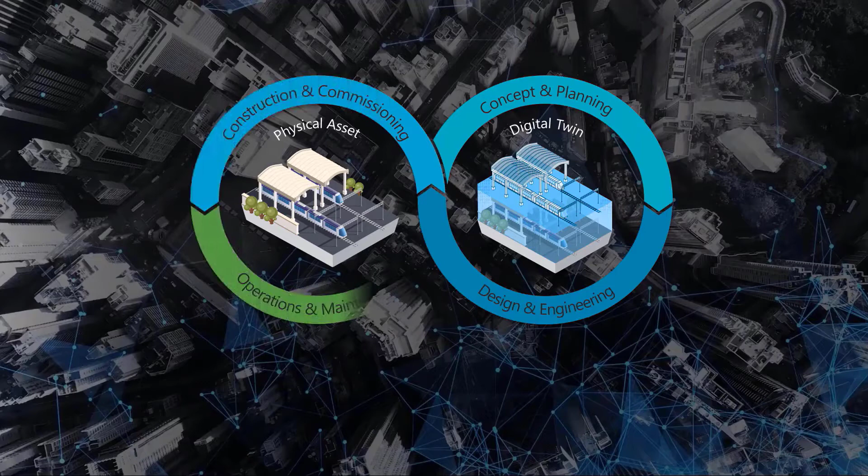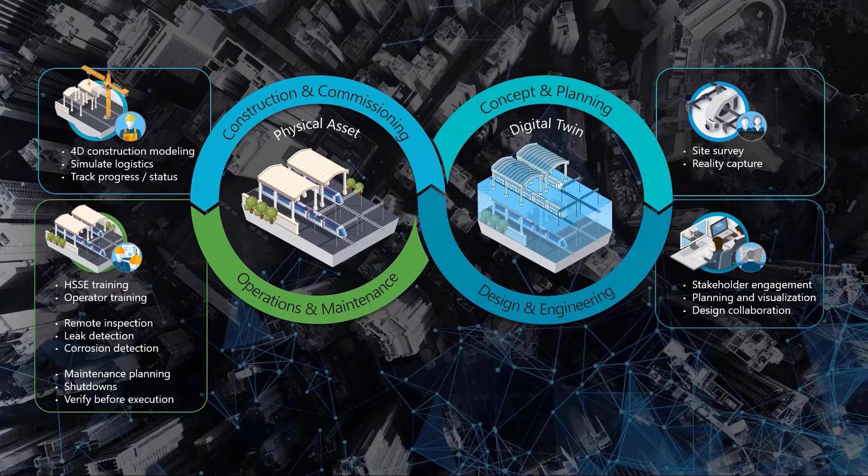We define a digital twin as a synchronized virtual representation of a real-world asset, a digital version of reality that is continuously updated. Now you might be asking yourself, why is this important to me, or what does it really mean? Or maybe, what can I do that I couldn't do before?

For starters, I want you to think about the Uber app on your phone. It's easy to use, provides real-time data, and gets you where you need to go. It's hassle-free and the interface is easy to use. The need to get from A to B never changed. What changed was the entire transactional experience.

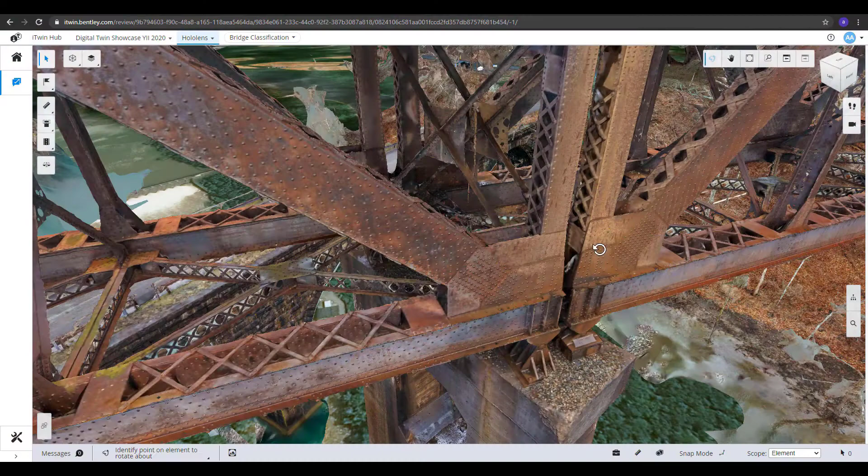When it comes to digital twins, we're taking a similar approach. We believe that interacting with the digital version of real infrastructure should be easy, intuitive, and deliver contextual, relevant information when and where our users need it.

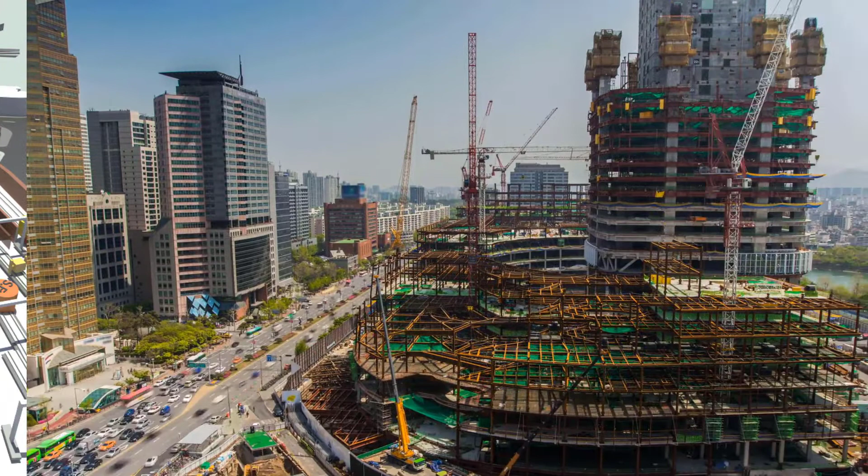How users transact with their information is shifting. We are seeing owners, designers, contractors, and users throughout the supply chain embracing this new way of working. We're talking about true digital evolution and how the physical environment and its real-world infrastructure, including all of the equipment,

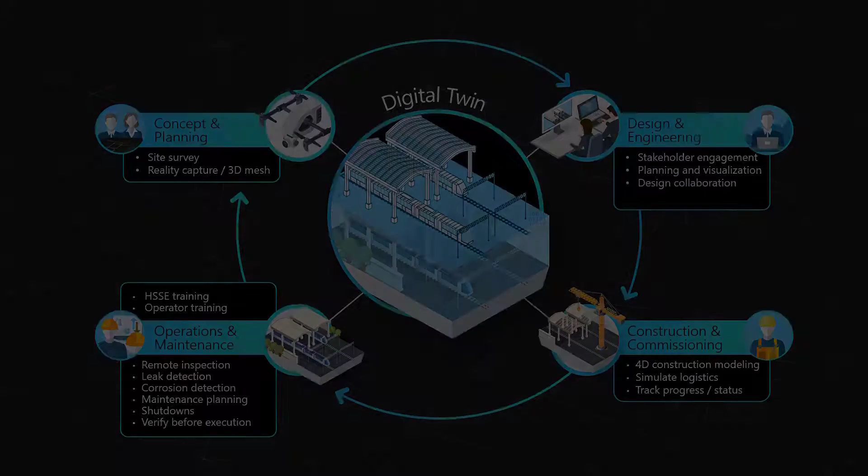materials, labor, sensor data, and related information, is managed throughout the life cycle. A digital twin includes the 3D geometry, design information, documents, issues, photographs, and point clouds, the full history of the asset as it changed over time. This includes the design phase, the construction phase, the operations, the maintenance, and any subsequent redesign.

So what does this mean to you? It means that you can now access, update, and most importantly, respond to information about your asset using an intuitive user interface designed for web, mobile, and mixed reality.

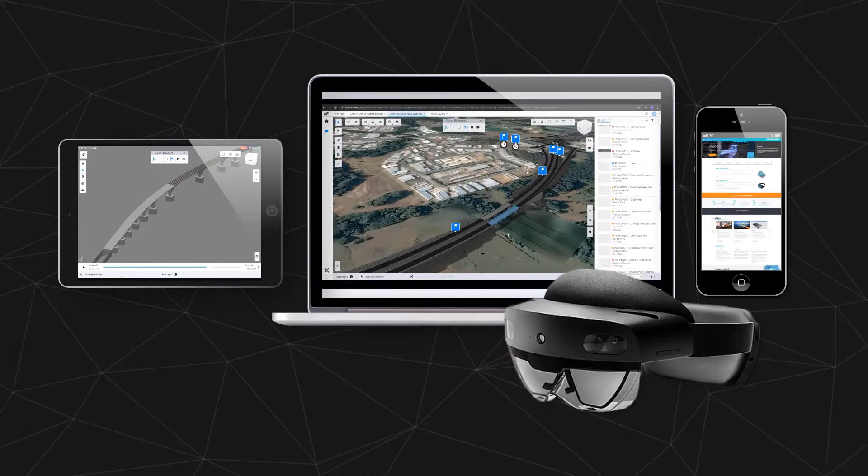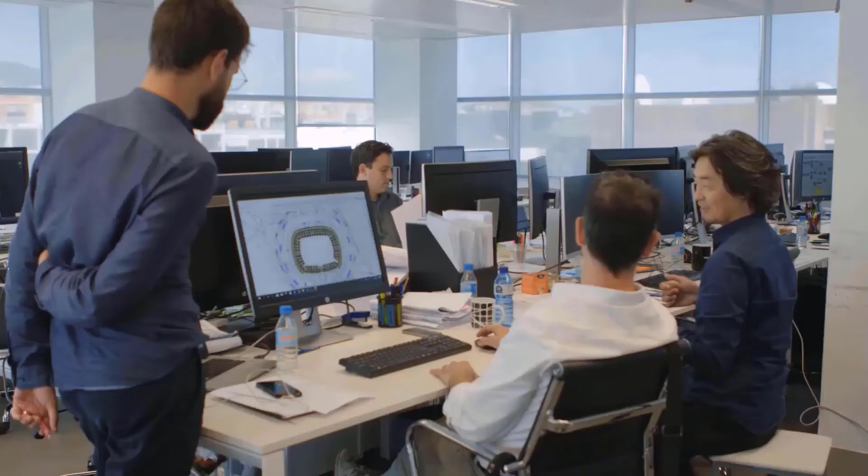So how is a digital twin different from BIM, Building Information Modeling? That's a fair question. The way we see it, digital twin is a non-disruptive evolution of BIM-centered workflows. It's a shift from static models to dynamic models, from files to change ledgers, from desktop applications to web apps, from 2D touch screens to interactive 3D holograms.

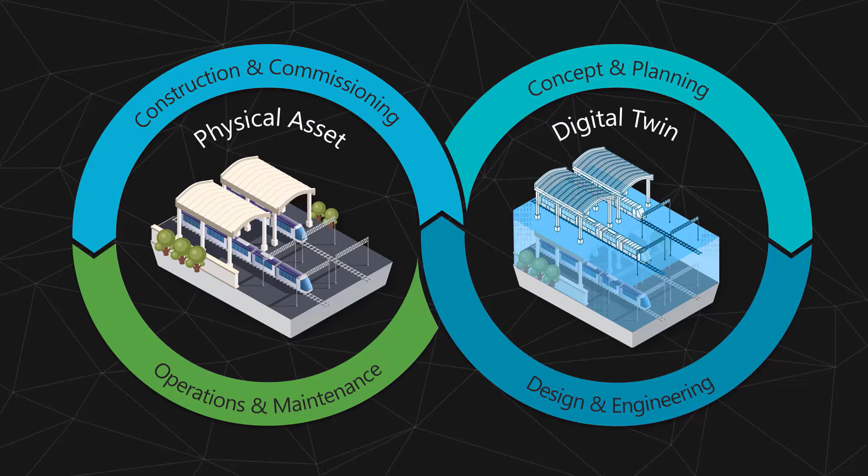Digital twins advance existing model-based processes by optimizing the feedback loop between team members, using modern, accessible user experiences backed by cloud services. The virtual and physical are converging, creating tighter and tighter feedback loops. And that is what leading organizations are getting out of digital twins: tighter feedback loops leading to better decisions, making better improvements in workflow productivity, human safety, and asset reliability.

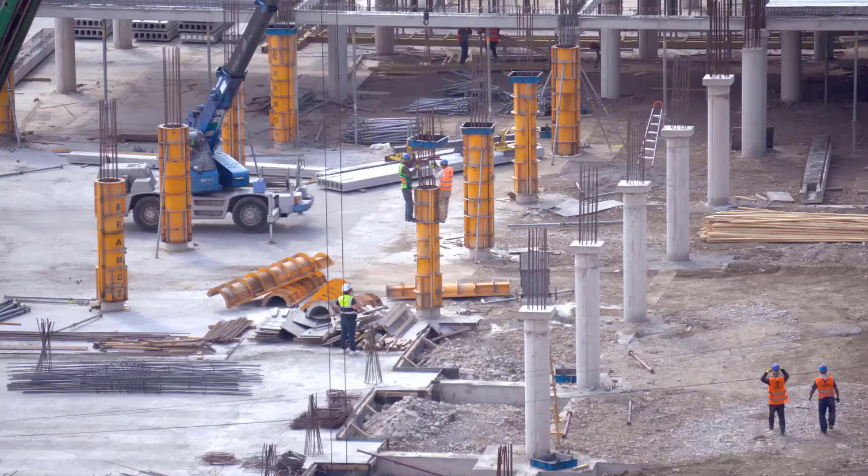For example, when a field engineer updates status on a concrete column being erected in the field, that information is reflected in the construction digital twin, and the project schedule gets updated. Likewise, when a sensor on a pump at a substation detects a problem, that information is conveyed to an engineer wearing a head-mounted holographic display.

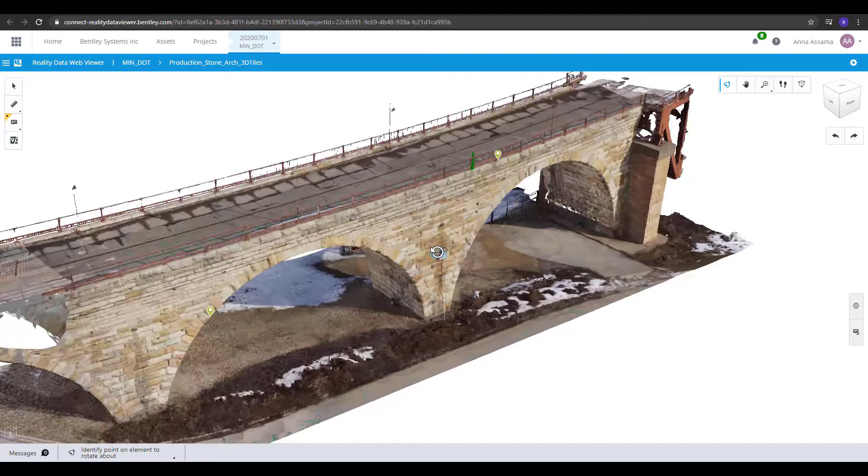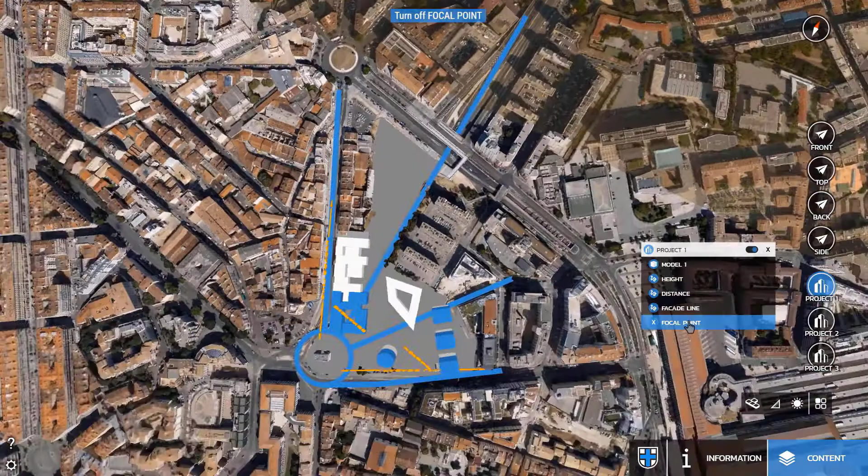And for a bridge inspector, he can now use drone capture with machine learning to automatically visualize defects on the bridge in an immersive 3D experience, allowing the bridge inspection to be done from anywhere. For the general public and citizens and residents in a city, they and the infrastructure that supports the city can be visualized and updated in near real-time interaction.

To talk about the impact of digital twins on city-scale infrastructure, let me introduce Sanjeev Shah to discuss the HS2 project, Europe's largest infrastructure project, and how the city of Helsinki is using digital twins today. So, Sanjeev, please walk us through the ways HS2 and the city of Helsinki are using and managing their digital assets through digital twins. High Speed 2 is Europe's largest infrastructure project.

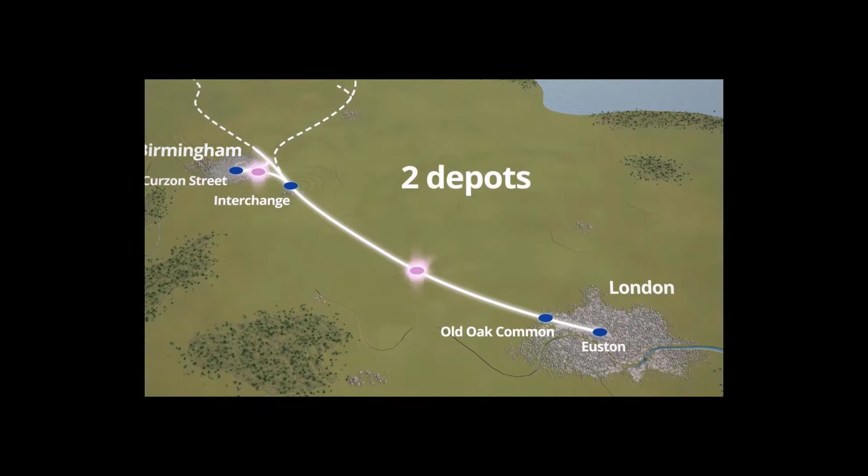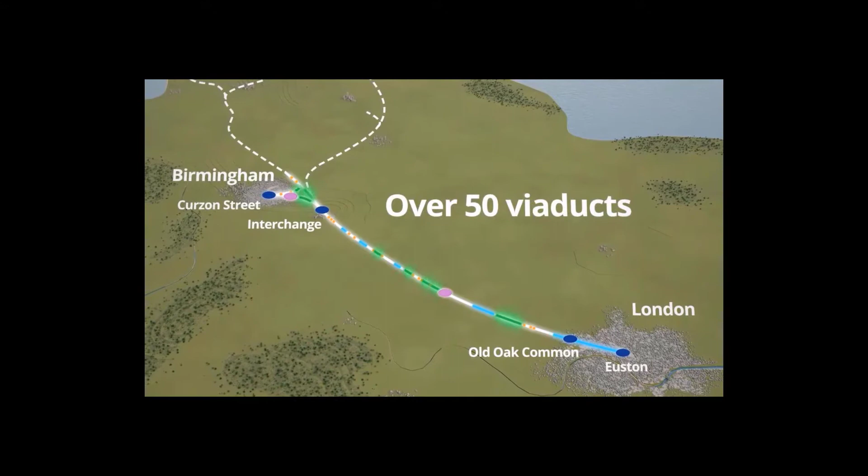But even still, they shared the same problems that many of you will be facing today. They use many specialist systems which create specialist content which is stored in specialist systems. So for a user to get to all of that information, they'd have to be proficient in each of those systems, they'd need licenses for each of those systems, and that can be expensive.

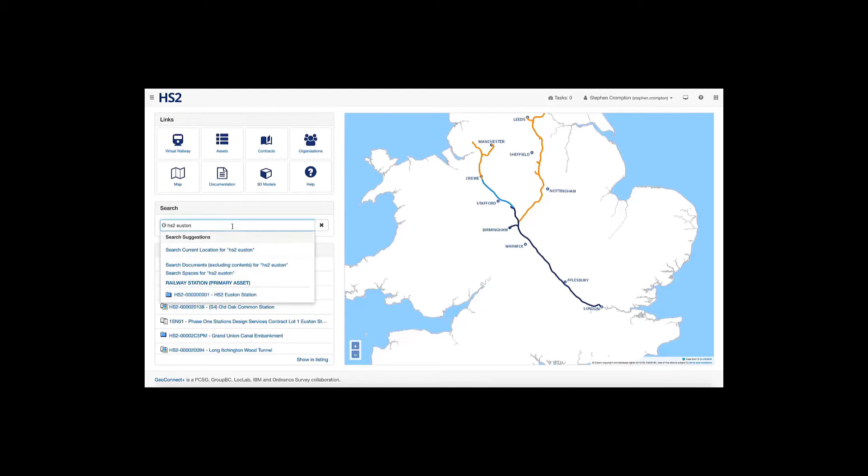It can be prone to duplication errors. It will create waste, it will lead to litigation and issues, and we don't want that to happen to you.

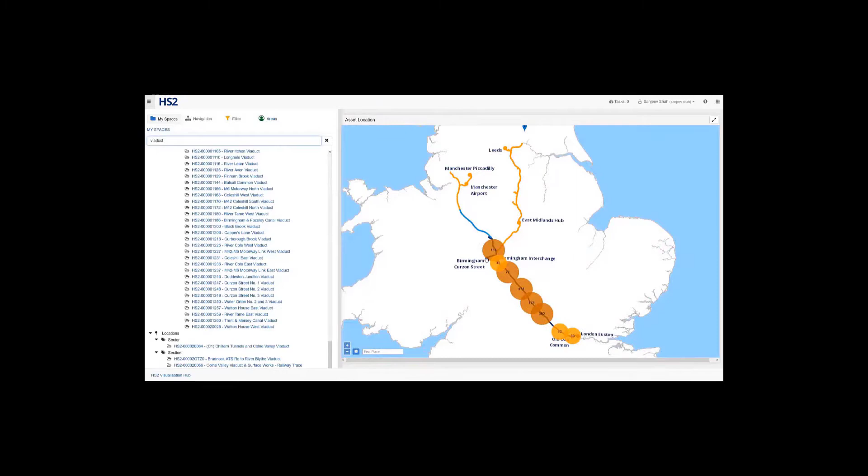What we're seeing, however, and what our users are telling us, is that by far the easiest way to get to content is through a geographical user interface. So here we can see through a quick zoom and a single click, we get instant access to a whole myriad of information.

And it doesn't matter if that information in the top left portlet has come from High Speed 2's asset information database, or whether the information we're seeing from models and from the documents has come from AssetWise and soon to be ProjectWise. The maps we're seeing are a direct federation from Esri ArcGIS.

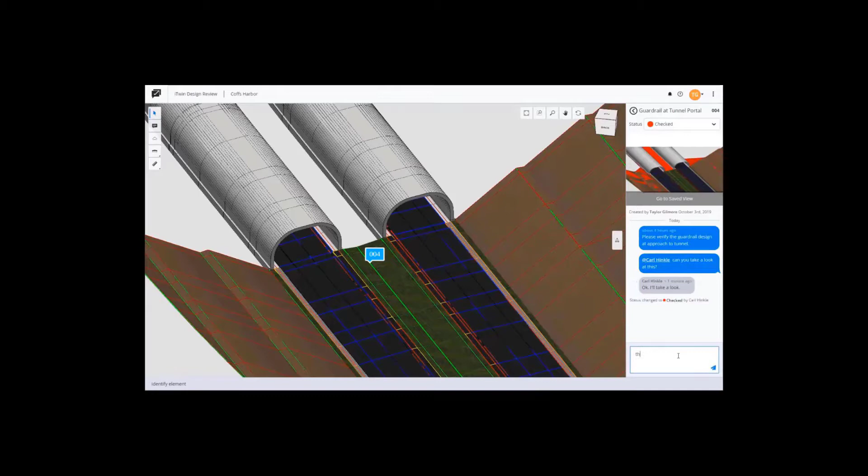But what if you wanted to get into models and see things at detail? Yes, you can just click on the models and they will open up, whether that's in a browser, a mobile phone or a tablet. And it doesn't matter if those models were created in specialist systems such as Revit or MicroStation or Navisworks, you'll still be able to view the whole lot.

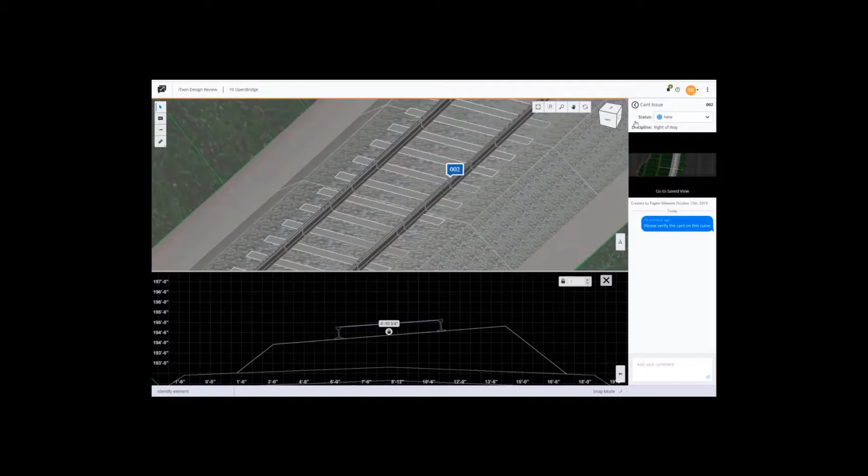It could have been a bridge, and they could have looked at the details of what the construction methodology was. They could have looked at the date that bridge was constructed, and they might have wanted to then zoom out and see all other bridges that were using the same construction methodology, installed at the same date, and that's exactly what we've done here. So on the right hand side, we zoom out, we can see lots of these cameras appear.

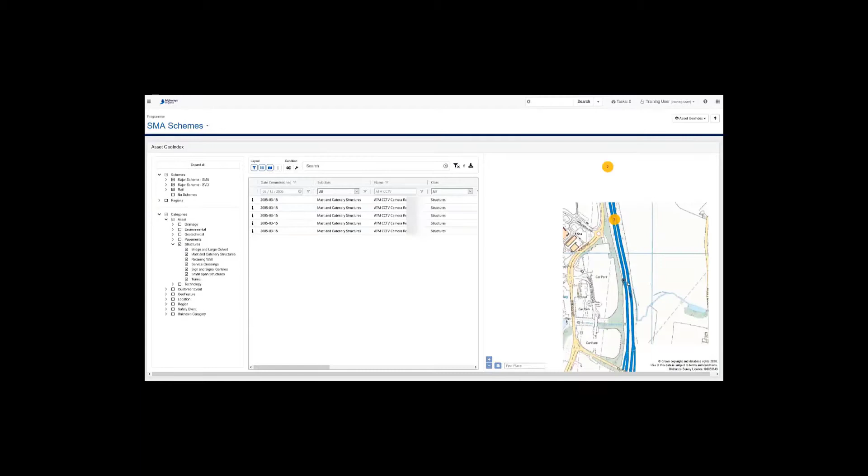A bit like TripAdvisor, what you see in your screen is what it's going to list on the left hand side. So that is now going from micro to macro. So yes, we can do this at scale, as we've just seen.

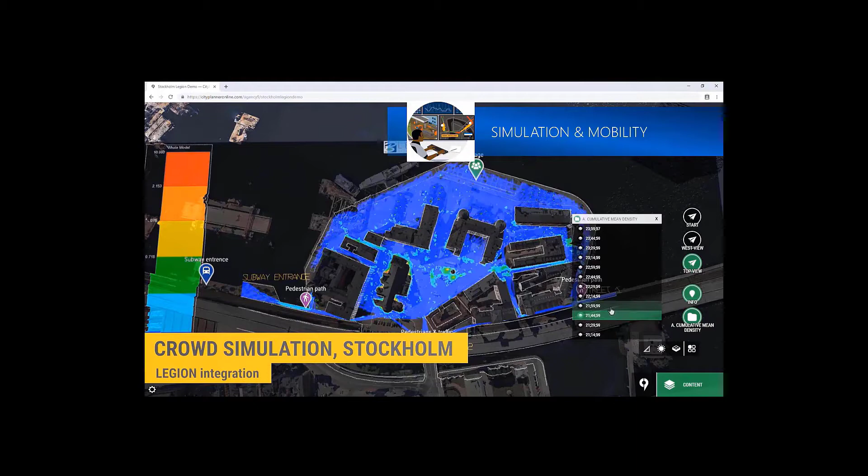City of Stockholm are using digital twins to provide a better experience for their citizens. So by bringing in flood data, information about the population, crime information, all sorts of external information combined to the spatial geometry, the data, the documentation, that is building a full digital twin.

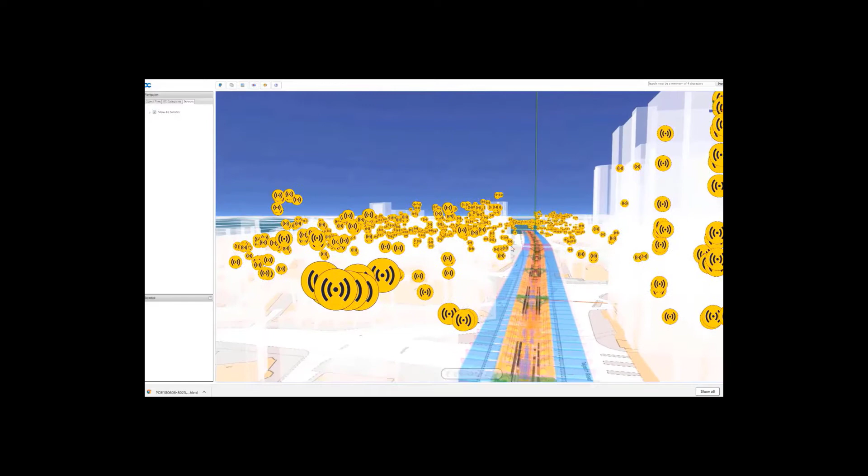But that data need not just be from sensors, for example. If we look at this example here, we can see a project in West London, and would you be amazed if I said these yellow circles are actually representing physical movements in infrastructure up to 1 millimeter? And would you be amazed if I said we've got no sensors installed here?

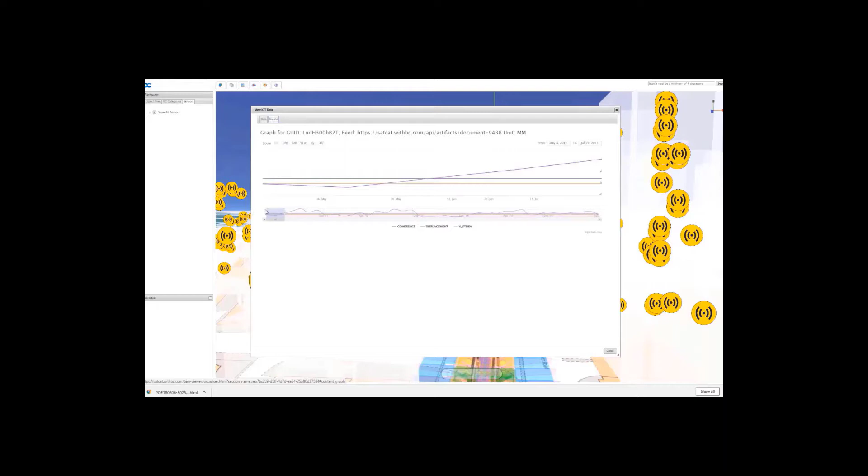All of that data is being captured from space, from satellites. So we can actually see the performance of infrastructure in places where we didn't even know we needed to monitor that. And what's even better is all of this data is being captured continuously.

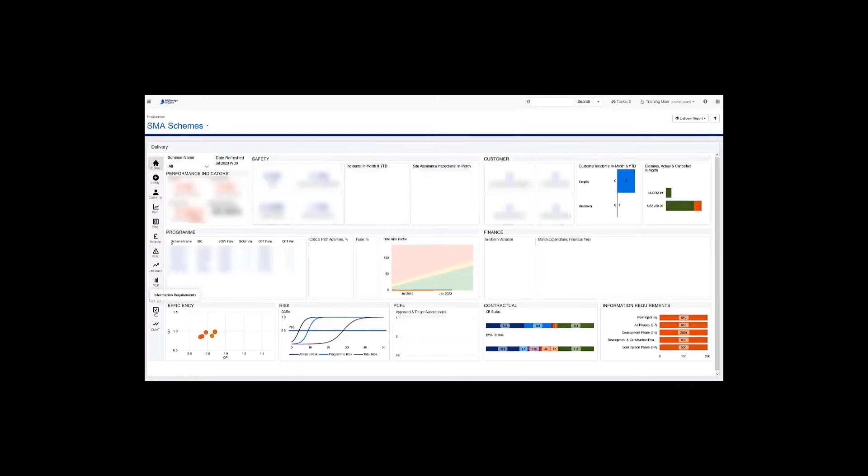So we can now go and tap into that information whenever we want to, which is fantastic. We're now able to run analytics and allow our users to see how they're doing with their KPIs, how they're performing, how their suppliers are performing, what information is missing, and that's the power of a digital twin.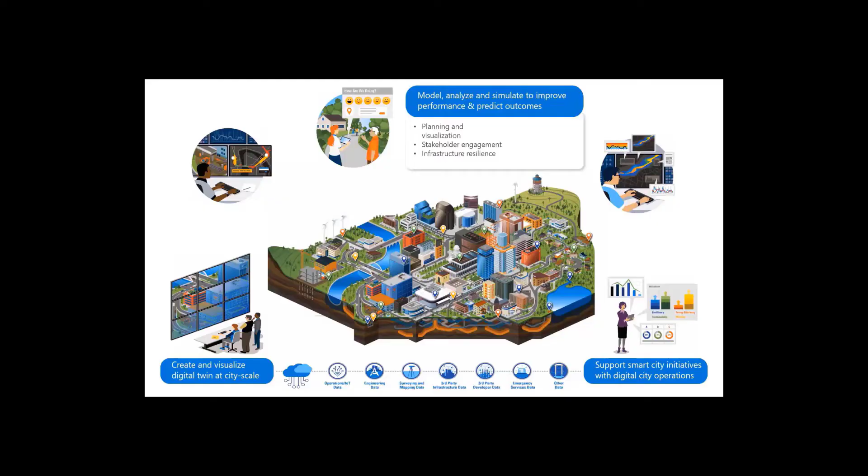Thank you, Sanj. It's great to see the infrastructure digital twin in action. It's been a pivotal year, some would even say a transformational year, when it comes to the collaboration for our entire industry. It gives us a chance to reimagine how we would work together, and more importantly, how our users work together. It allows us to see how our technology is making a positive impact in our users' lives.

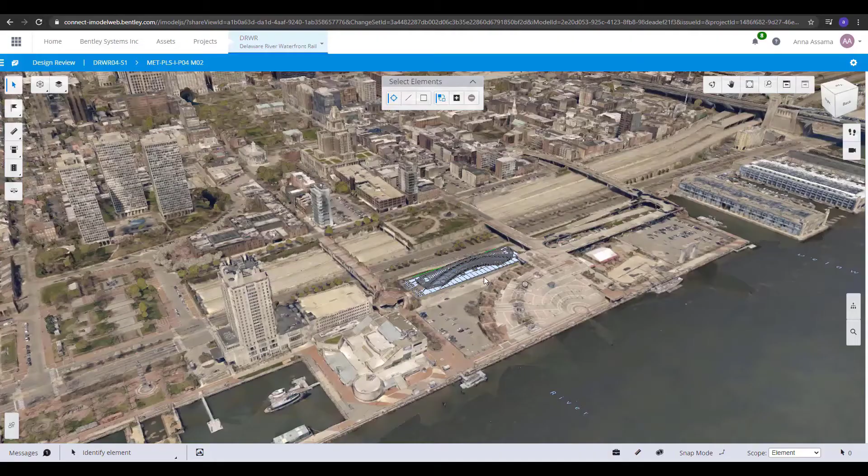Let me introduce you to iTwin Design Review. Design Review is a web-based capability that enables you to review design models with ease. It is open when it comes to source files. You can work with files from Bentley, Revit, Navisworks, AVEVA, SmartPlant, IFCs, or Tekla, any format, you name it.

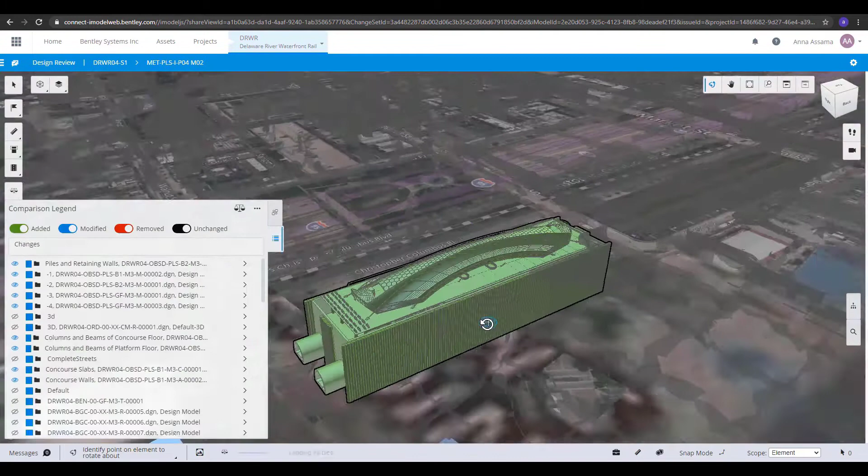Once the models are loaded, you can begin collaborating with all your peers in real time to view project status, identify issues, start solving real-world problems. Everything is web-based.

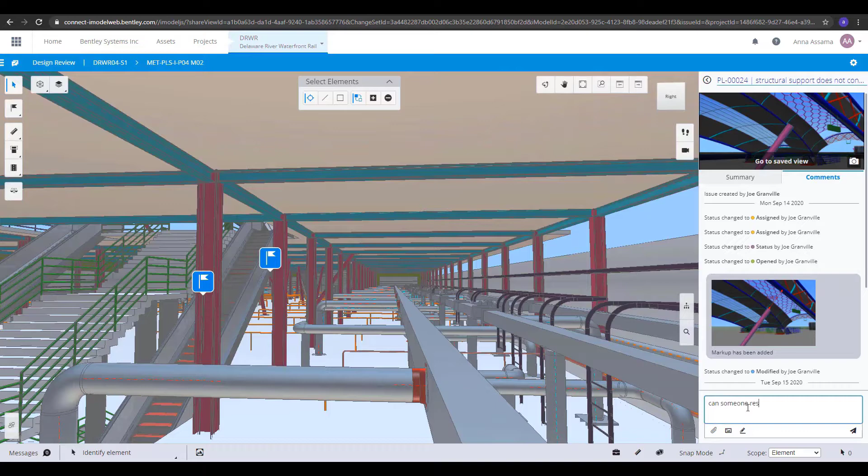As a user, you can log in anywhere using your web browser. Any information that is added from any user, anywhere, persists in the iTwin, making collaboration simple. With real-time chat, issue resolution, model comparison, clash detection, saved views, markup, we've optimized the user experience for communicating about the problems that need to be resolved.

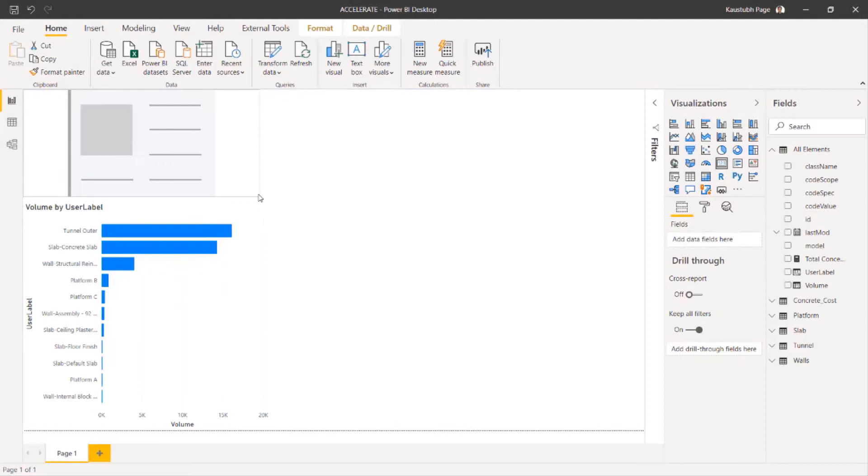In addition to identifying design issues and clashes, you can also perform data quality checks. These automated checks help identify inconsistent data structures and naming conventions, which will help you keep your project well structured and enable data analytics. As Peter Drucker stated, if you can't measure it, you can't improve it.

Having structured data is what feeds the iTwin Design Insights, where you can define key performance indicators such as cost, schedule, risk factors, and carbon footprint.

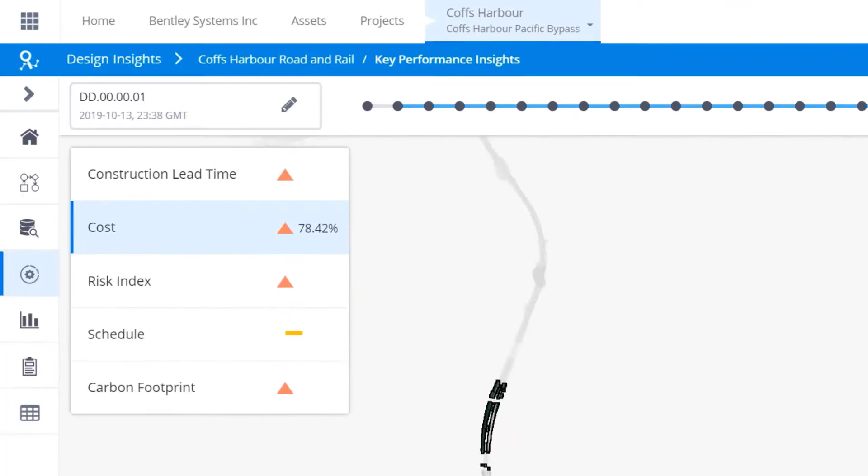When a design is updated, the changes can be visualized from a comparison dashboard. Here you can see trend lines and make informed decisions based on the data.

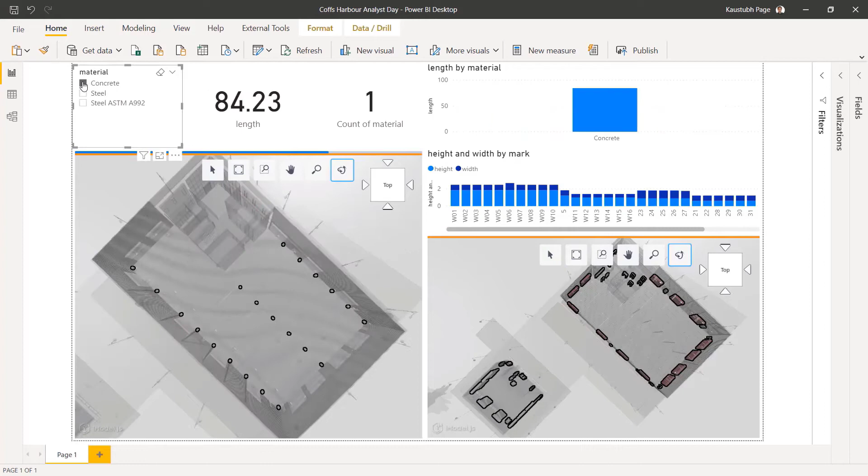In addition to these out-of-the-box reports, we see an increased use of Microsoft Power BI by our users. In response, we've created data connectors so that the digital twin data can flow into Power BI and integrate with enterprise BI reports.

In addition to the Power BI integration, we're also excited to announce that iTwin Design Review is now integrated with Microsoft Teams. The use of Teams is accelerated dramatically, and this integration brings iTwin functionality directly into the team experience.

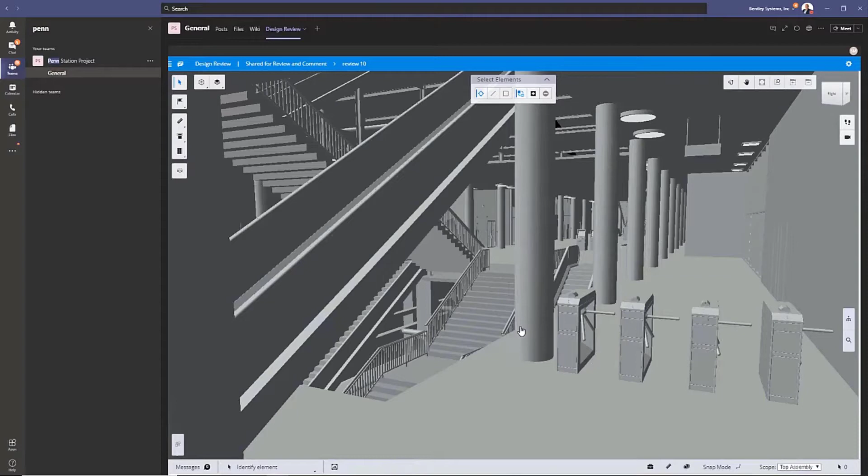Now with a few clicks, you can add an iTwin tab, making it easier than ever to access digital twin models. This opens up digital twins to non-technical users beyond engineering, helping them correlate and make sense of complex data in an interactive visual medium.

We've seen the power of iTwin, a web service that enables teams to optimize collaboration. Now let's look at how our users are using the same technology to bring design to life during the construction phase.

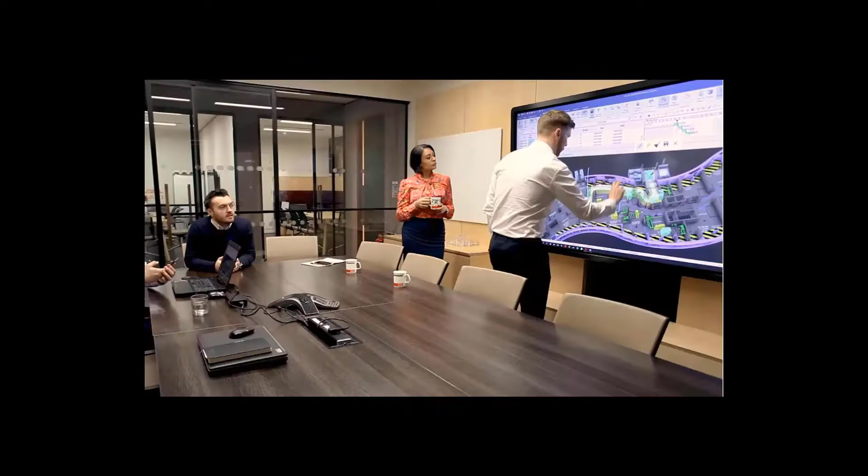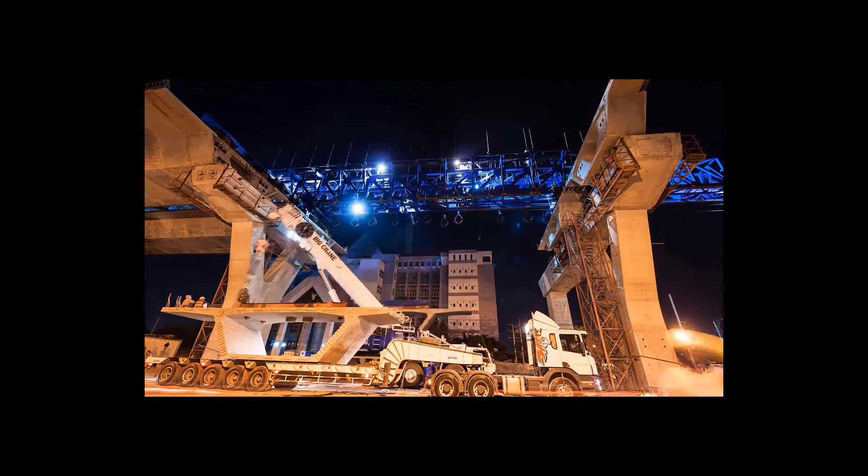To do this effectively, our users love to communicate a great story. A story that explains how the design is going to be built over time. A story that clearly explains all the materials, labor, and equipment that are needed, both when and where.

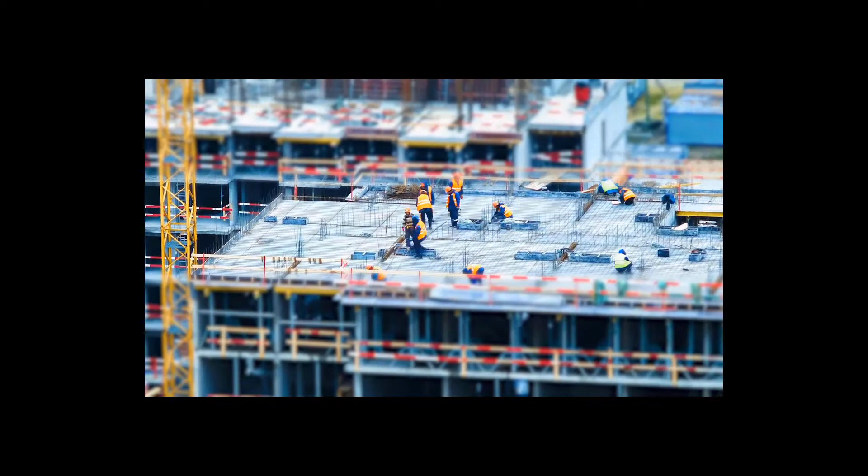A great project is not only one that delivers on time and on budget, but one that is delivered safely with minimal risk to the workforce.

Today, contractors all over the world are harnessing the power of digital twin with Synchro 4D to deliver projects on time and on budget. With Synchro, design models are rendered according to the construction schedule, creating an intuitive visual medium for understanding and planning a construction project.

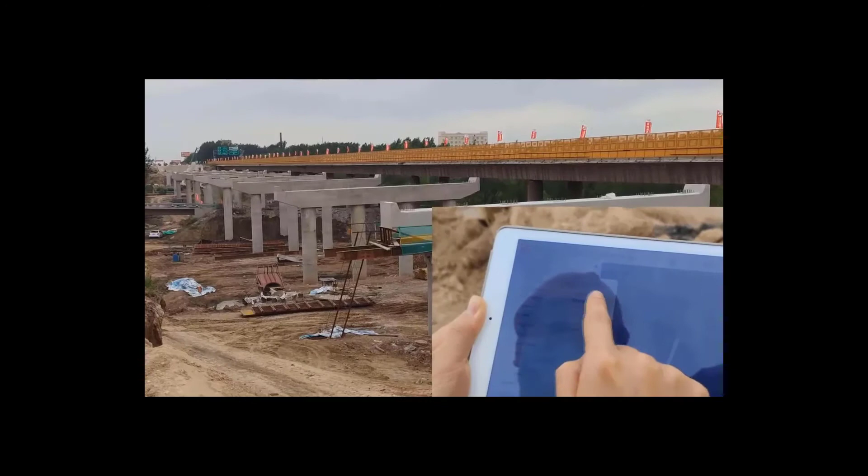Now, with a construction iTwin enabled, it provides the same ability to track issues and monitor changes as we saw with the iTwin Design Review. Users can collaborate real-time from anywhere, including from the field.

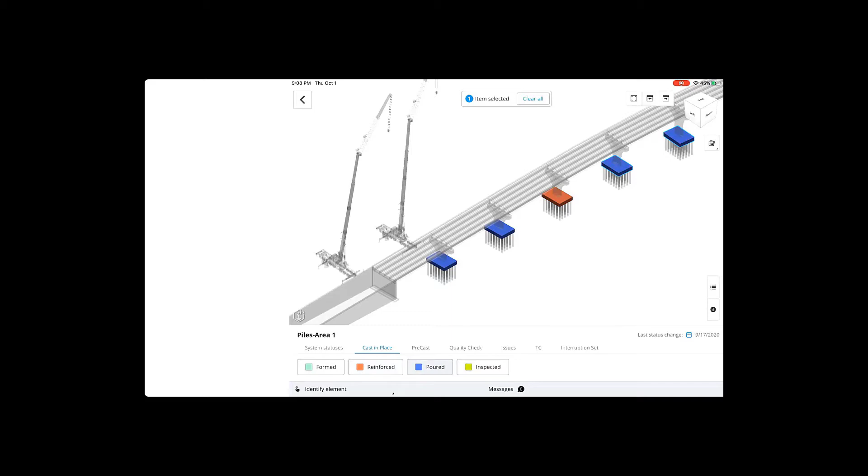With a construction digital twin, information can be updated in real time, allowing team members not only to plan construction, but also track progress in real time.

With the information available on the web, it's also available from mobile devices, allowing users to update status, log observations, and create daily logs. This information from the field is synchronized with the construction digital twin.

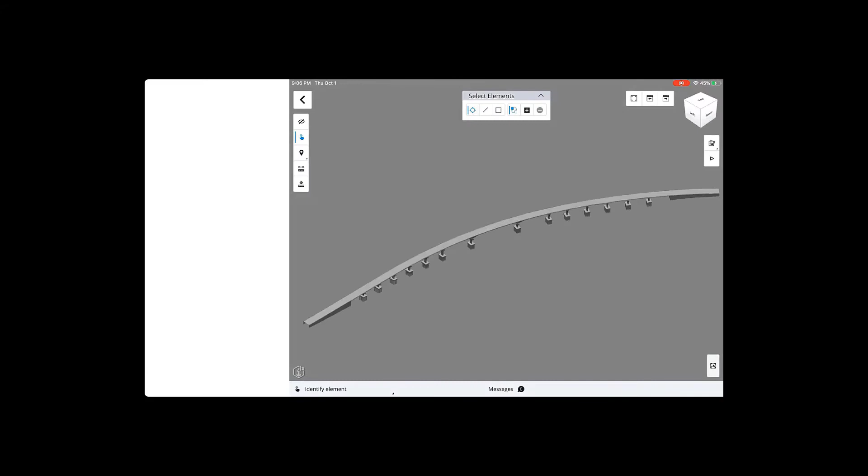To plan a project, users import the design models and break those models into smaller sections based on how they want to approach the work. Splitting a design model calculates quantities, making it possible to calculate duration and daily work planning.

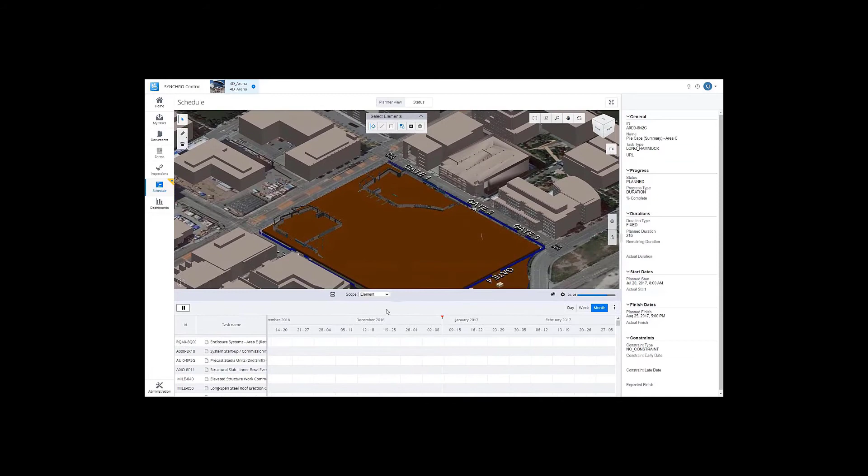The result is detailed visualization backed by real schedules and real quantities, all visible and available via an easy-to-use web interface or as a high-quality animated video.

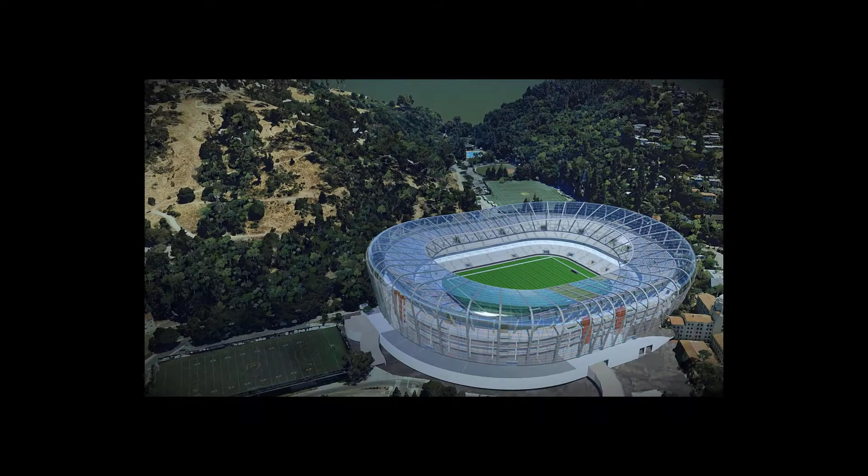On this front, we're excited to announce a new development of a new graphic pipeline that will take 4D animations into LumenRT, where users can augment the rendering with people, cars, plants, realistic environments, and high-quality materials.

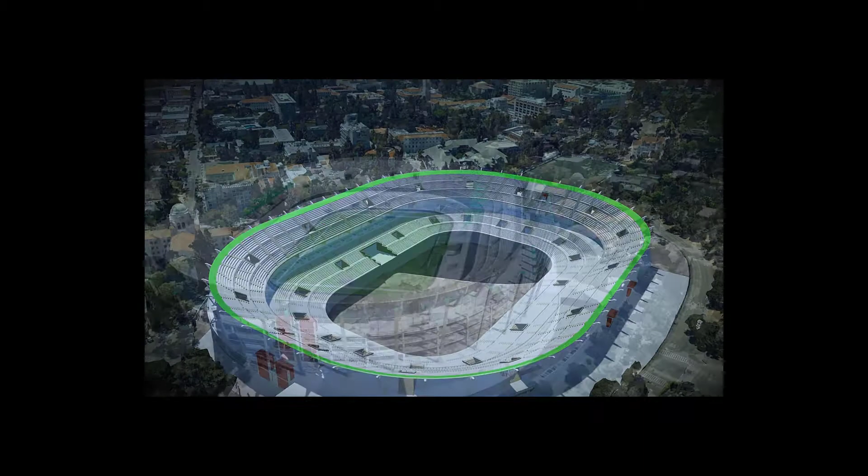Not only that, but the experience is real-time rendering. No need to wait hours or days for rendering. And the quality is absolutely stunning.

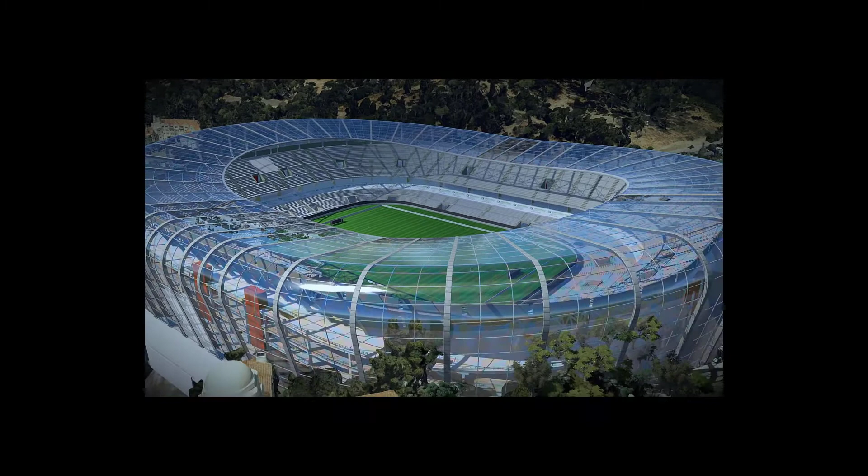What if you don't have an engineering model or a construction digital twin? How can you create a digital twin from an existing asset?

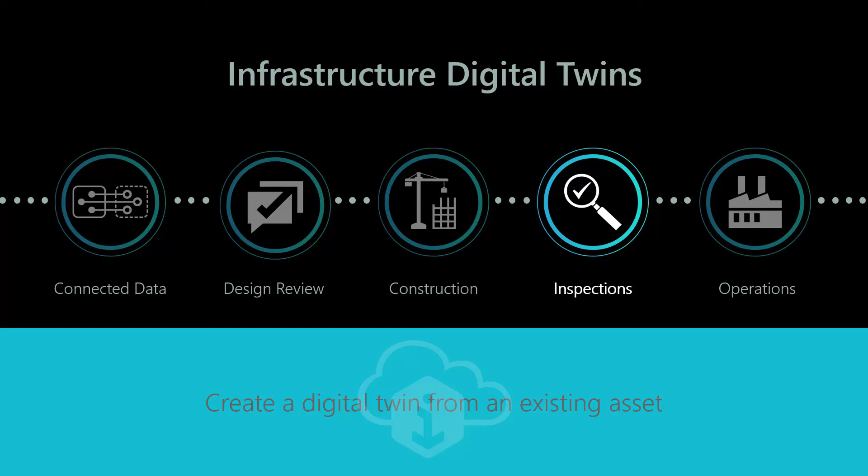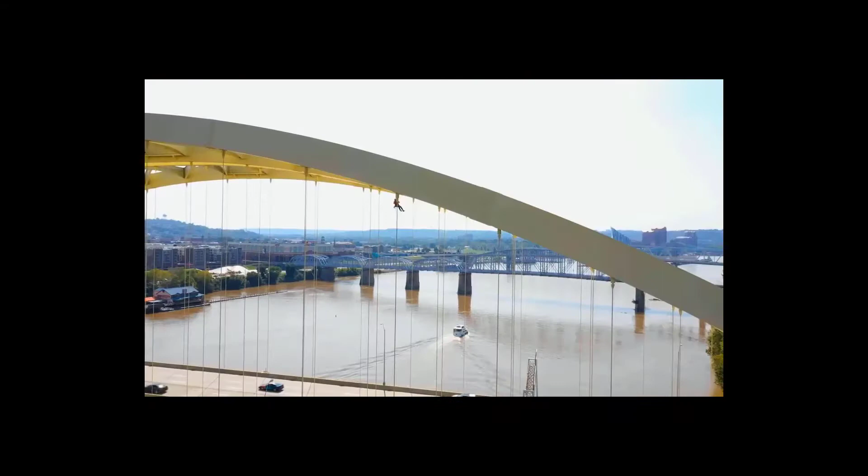Let's take a bridge inspection as an example. Today's bridge inspection requires expensive equipment, involves high safety risk, takes significant time, and carries a high cost. In most cases, there's no digital history of the bridge.

Some of our most advanced users are reimagining inspection through the lens of a digital twin. In Minnesota, the engineering firm Collins is leading the effort, fundamentally changing how infrastructure is maintained over time.

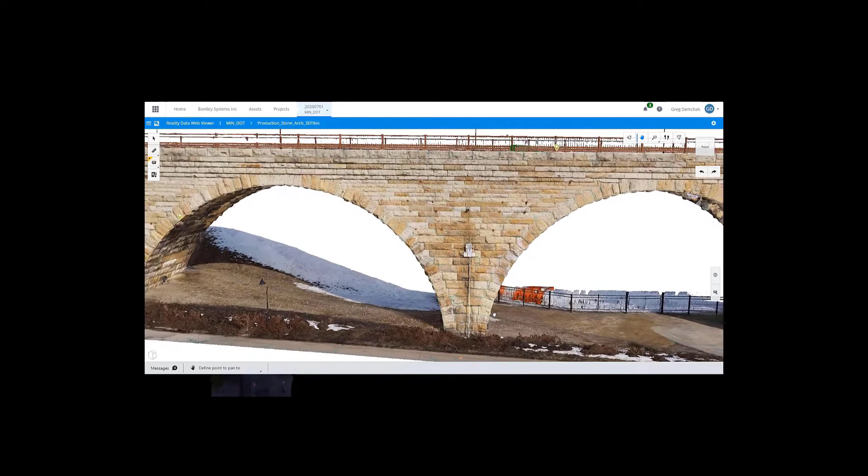With the real drone capture, it is possible for them to experience a virtual bridge in full detail as if they were actually at the bridge. The difference is they don't need a machine, safety harness, or a car to get there.

And they don't need to close the bridge to perform the inspection. They are looking to do the whole inspection remotely from anywhere.

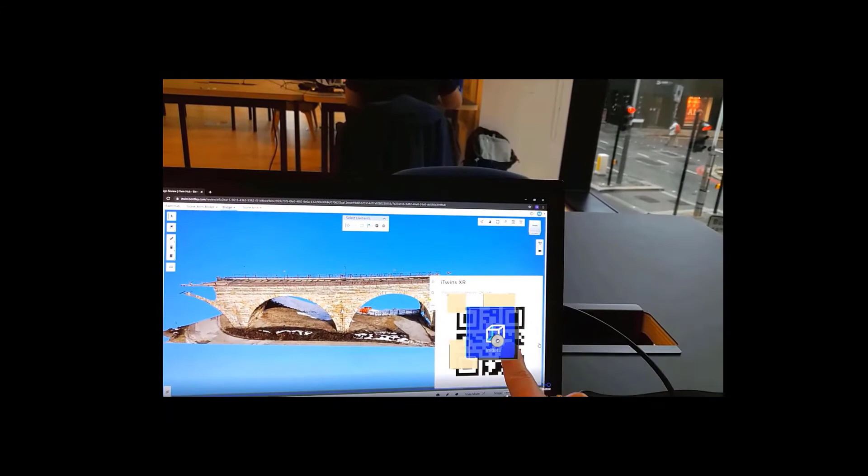Here you can see an amazing level of detail that can be experienced in mixed reality. The user can observe an issue, a defect, and mark it up with natural hand gestures, take a measurement, and fill out a form with their voice.

The inspection information is then synchronized with the digital twin, where the results are visible in the web browser. The full history of issues is now time-stamped and logged for future use.

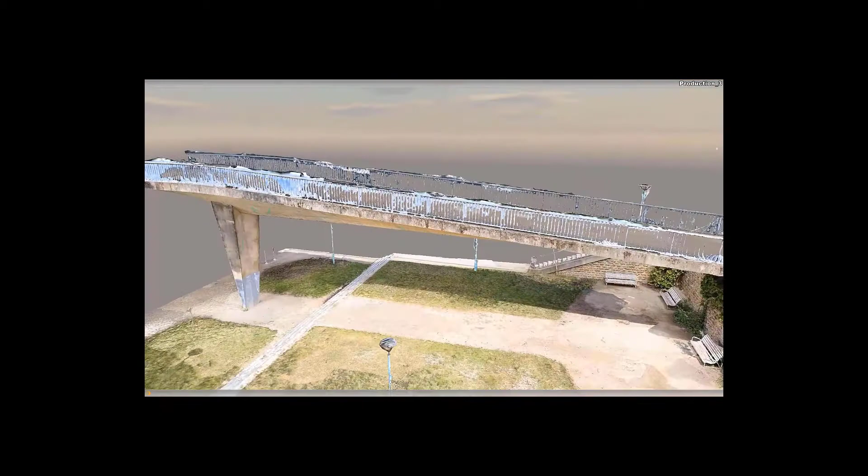And that's not all. Using machine learning, we can now identify common defects automatically. Here you can see cracks being identified and colored. These can be validated and checked with the browser, phone, or HoloLens.

Now we're going to shift focus to operating assets and talk about how our users from leading organizations in the plant industry are benefiting from digital twins. And for that, I'd like to introduce you to Maureen from our plant site team.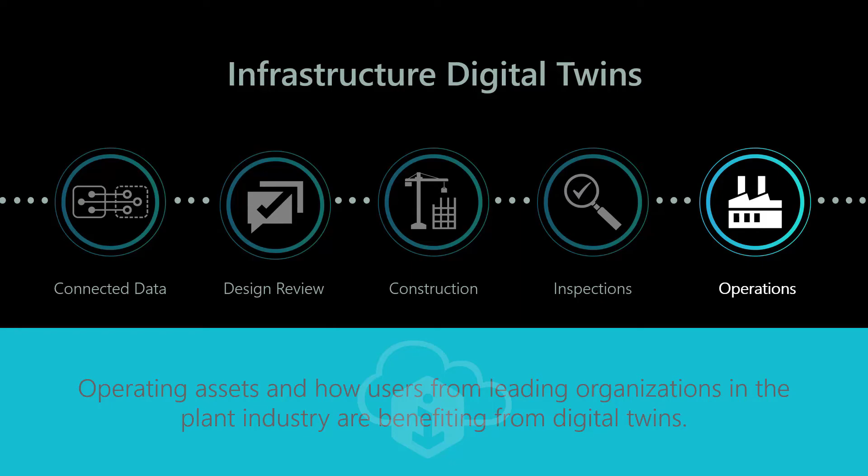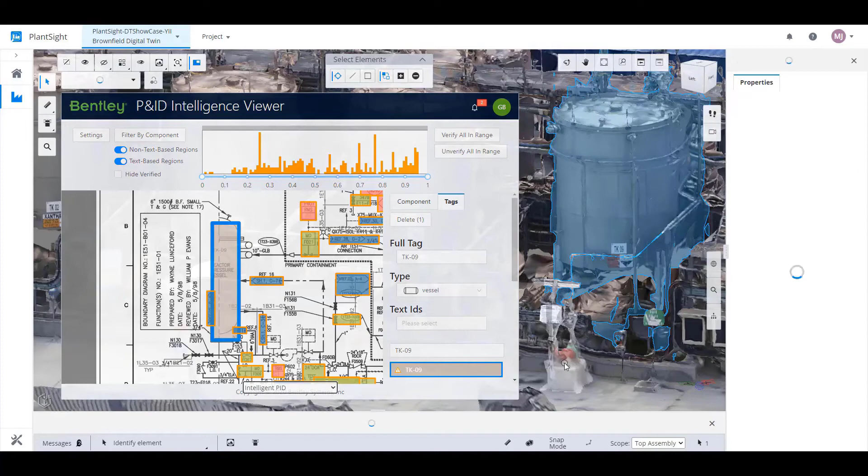A process and instrumentation drawing, P&ID, is an important document. It is a blueprint of every process and power plant and comes in a variety of quality, symbol palettes, and overall complexity. Access to an up-to-date P&ID ensures safety of personnel and assists engineers in understanding the plant's operations.

These documents, typically stored in vaults, require workers to physically retrieve them. This is not only time-consuming but also makes tracking changes difficult and error-prone.

To solve this, alongside our reality data solutions, we have developed powerful AI and machine learning tools to extract meaning and understanding from these analog documents.

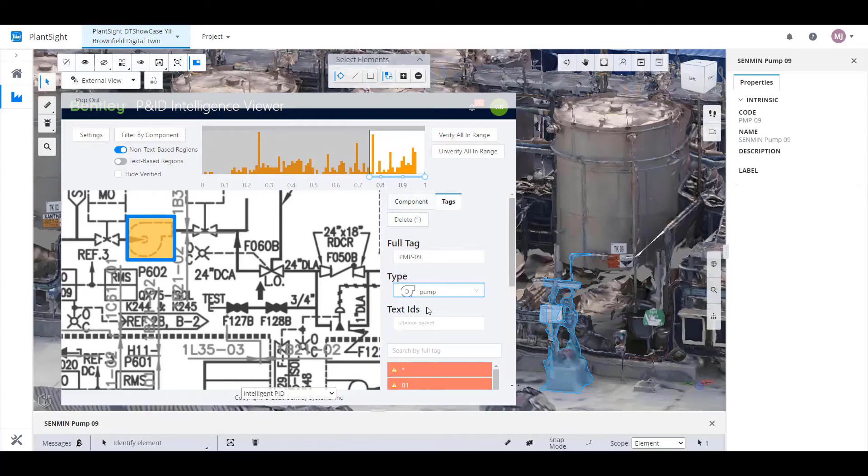While many companies are currently spending days having humans painstakingly recreate each raw document in a design application to make them intelligent, our approach here completes this task in mere minutes.

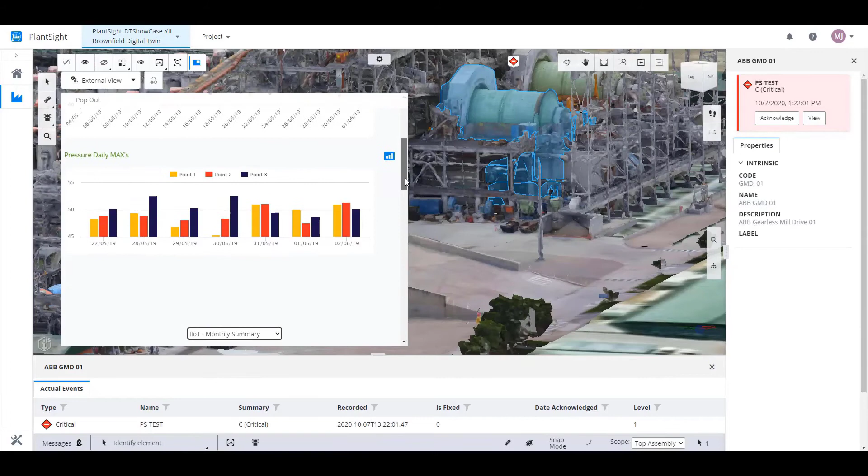This revolutionary patented technology makes the benefits of a digital twin immediately accessible to existing plants and unlocks latent value for our users. By integrating this output with PlantSight and AssetWise, we provide owners and operators a solution to efficiently realize the digital twin, empowering them and their teams to make informed decisions and take corrective action.

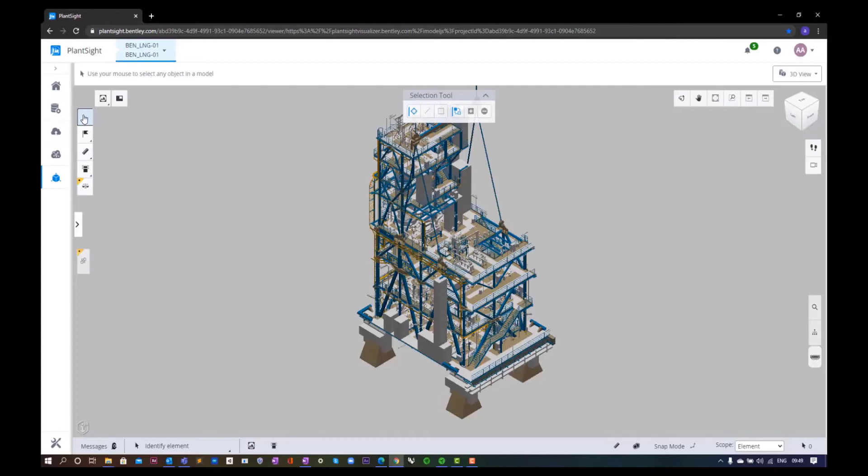Now let's shift gears and take a moment to look at industrial digital twins in the engineering phase. In any project, the cost and risk of an undetected design flaw increases based on where we are in the project's life cycle. Easy and democratized access to up-to-date information is the bedrock of efficient project delivery.

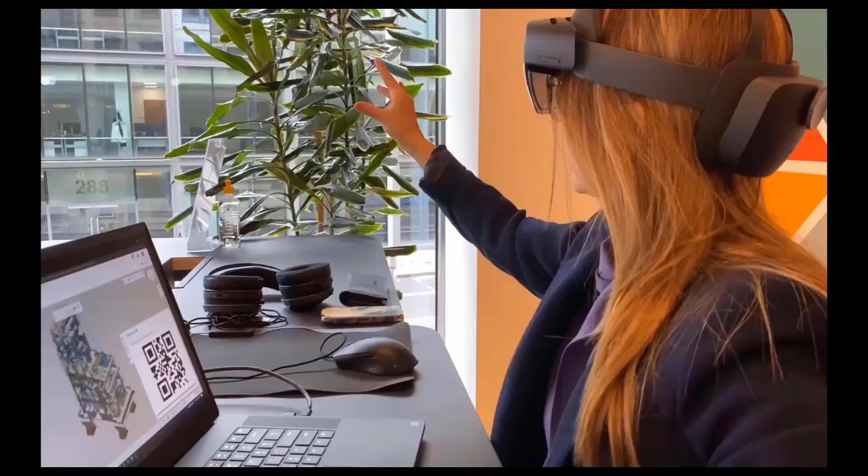Our users, like the one designing this section of a floating production system, are already telling us that PlantSight has improved design collaboration between the traditionally siloed teams.

Now all of the stakeholders have the same view of the digital twin, leading to faster and higher quality 3D designs. These models are then being used for handover between engineering and operations, shaving weeks off delivery schedules and bringing higher returns on investment.

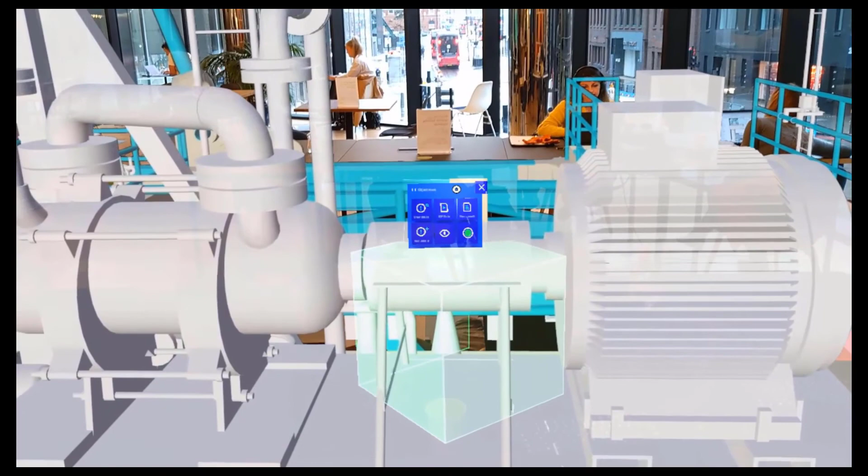Issues can be identified in real scale with the HoloLens and verified in the browser. The same data is synchronized between both environments.

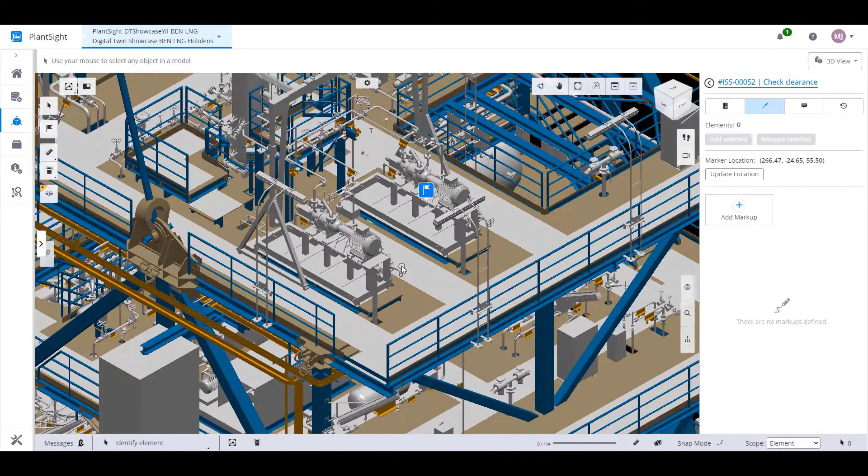Users are already reporting that collaboration with this immersive experience is enabling them to understand their design from a human-centered perspective. With issue management integrated into our desktop, mobile, web, and mixed reality applications, you no longer have to pass files and notes around in emails.

All design decisions are electronically captured, ensuring that you not only have a timeline of change for engineering data, but also a complete audit trail of why those changes were made.

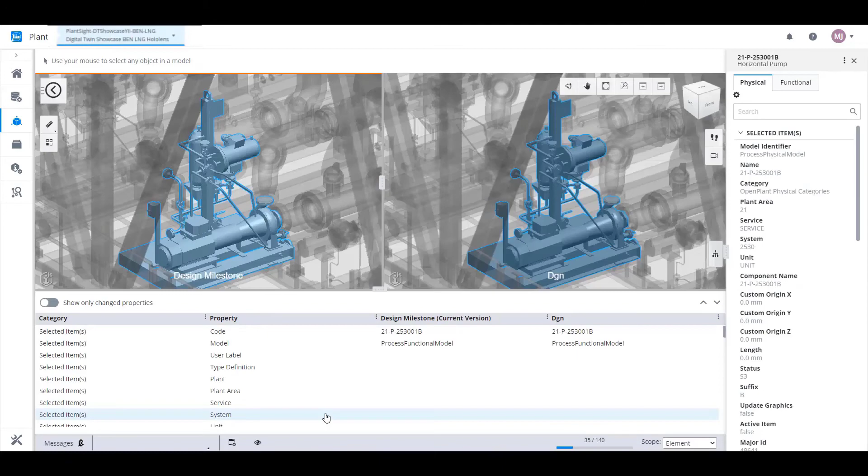With our digital twin capabilities, we have taken the suspense out of the design process, ensuring your heart skips a beat only when you see your amazing designs come to life.

Thanks, Maureen, for sharing some of the latest digital twin capabilities that are exciting our users that are operating large plants around the world. I really hope what you've seen today excites you and that you are inspired by the larger picture and are as fascinated as I am with the details of building digital twins for our world's infrastructure.

I want to thank you for taking time out of your day to explore some of the most interesting applications of digital twins today, and to see for yourself the huge potential this technology has to offer.

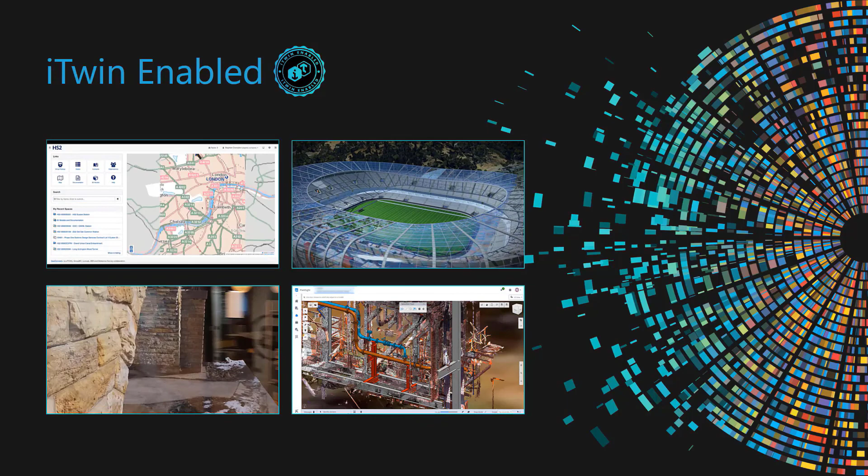This was just a glimpse into some of the exciting technology in use today and what can be achieved with a digital twin. I hope this lifecycle showcase of digital twins helps you see the changing paradigm of the digital transformation in digital twins.